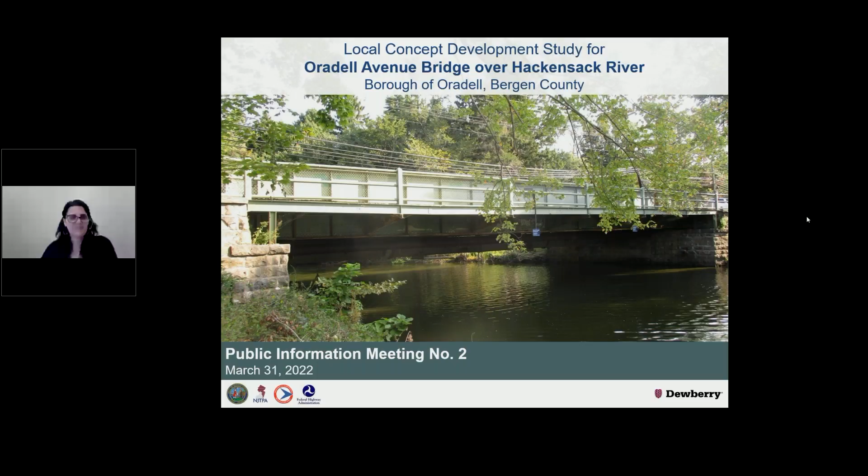Good evening, everyone, and thank you so much for joining us tonight at the Public Information Meeting number 2 for the Local Concept Development Study of the Oradell Avenue Bridge over the Hackensack River in the borough of Oradell in Bergen County. My name is Nicole Pace-Addeo, and I've been serving as the Public Outreach Manager for this study, along

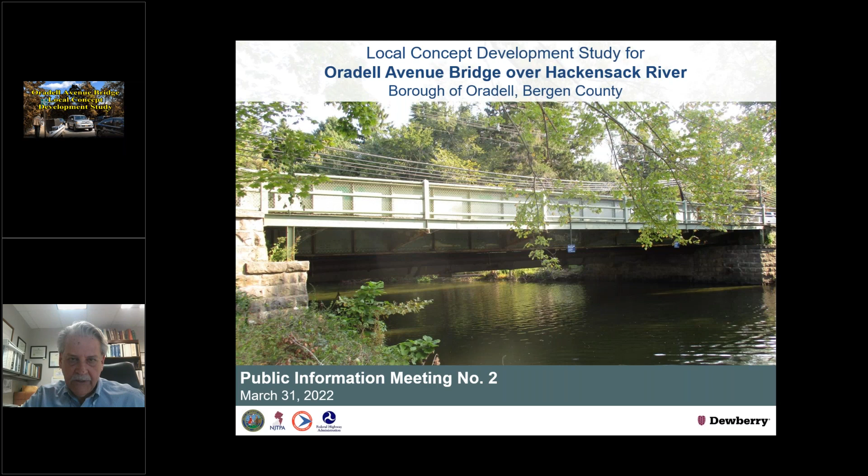So I will try and go through things quick. We can always go back through the slide presentation if there are areas that you'd like to revisit. So with that said, let me get rolling here. As I mentioned, today's agenda is really to bring everybody back up to speed since last time we met as a general public meeting, which was about a year ago. We have done a lot of work since then. We've gathered a lot of data. We've spoken to a lot of folks.

We've interacted with several. And we're here tonight to talk about the different alternatives that we identified to address the physical condition of the structure, and go through those with you and obtain feedback on the alternatives, so that we can walk away with support of a recommended or preliminary preferred alternative, or PPA as it's called, and then give you the information on what the next steps for the life of this project would entail.

So I'll touch base real quickly on a little bit of the history. Obviously, we're here tonight to talk about Oradell Avenue Bridge, which carries Oradell Avenue over the Hackensack River, located in the heart of Oradell. As you can tell from this aerial map, it's a major thoroughfare that links a heavy residential area to the east of the river with downtown Oradell, and a lot of public services and such. The train is immediately adjacent to the bridge. So it's a vital link within the region.

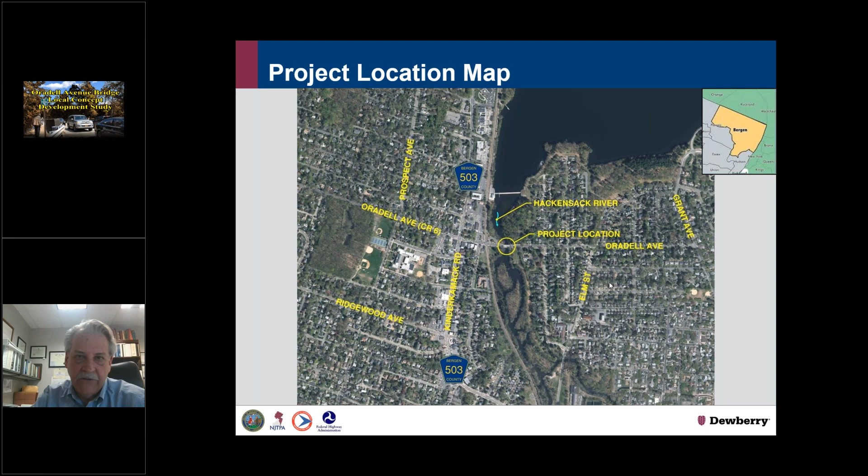To zoom in on the site itself, you can see how close the bridge is to New Jersey Transit's tracks and the Oradell station in downtown Oradell. It's surrounded by park property, environmentally sensitive property.

Rich, if you don't mind. Yes. Rich, we are only seeing your face, not the maps. Not the maps? That's not good. Hold on one second. No problem. Rich, I'm seeing the map. Yeah, we're all seeing the map. It must be just you, Bashar. All right, everyone's seeing the map except him. So let's continue on. Go ahead, Rich. Fortunately, Bashar, you know a lot of this anyway, so this will be just a brief revisited history. No problem. If it's only me, that's fine.

Okay. So just to give everybody a quick synopsis, in addition to carrying vehicular traffic, both eastbound and westbound, the bridge itself serves to carry public and private utilities as well. So as we're studying how do we restore the structural capacity of this bridge and maintain traffic and minimize impacts to the environment, one of the things we also have to do is make sure that we accommodate the public utilities.

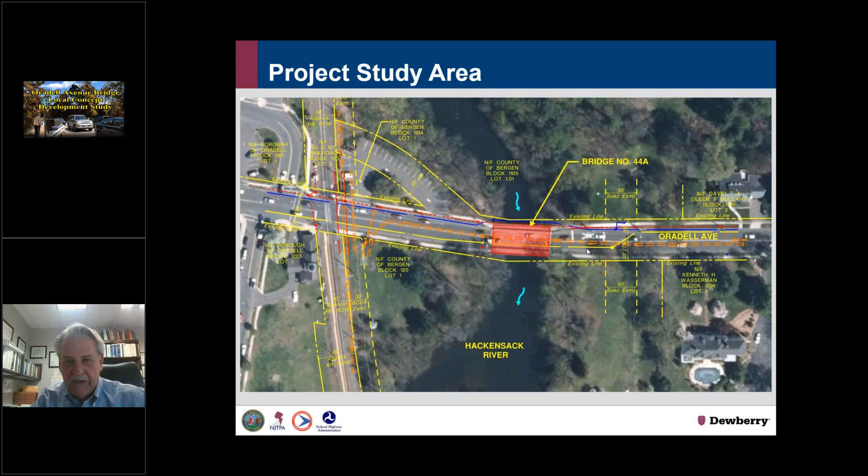So that will be touched upon in the presentation as I go through as well. Quick history on the bridge: built in 1904. So it has certainly outlived or lived its life, over 115, 118 years in existence.

The substructure, all the masonry work that's there, is from 1904. The bridge has undergone repairs over the years, but it is just time. Based on the inspections that are done on a biennial, every 2-year cycle, it's been identified that there's issues with the structure, there's concerns with its integrity, and the county and NJTPA recognizes

that these projects do take time to get from concept through to final design and be in position to take advantage of funding. And that's why we've studied the project that's starting now, so that it can get a preliminary preferred alternative and then advance to the next phase of its life and into the design phase.

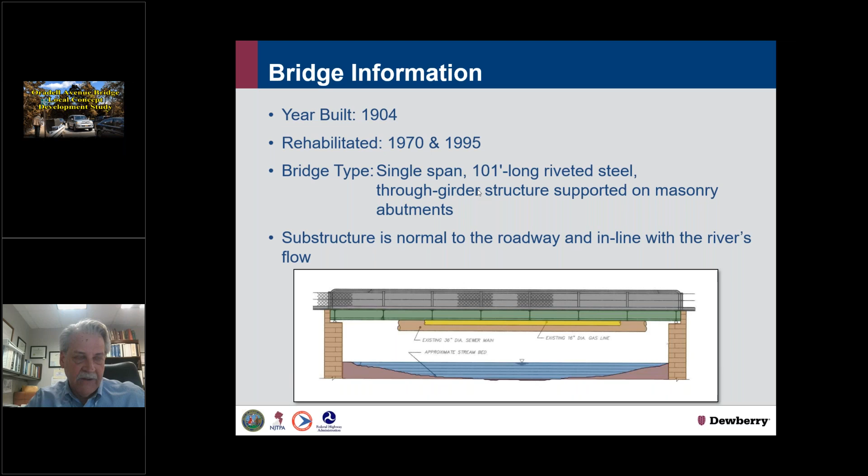A couple critical items that we'll talk about. One is the actual condition or the physical framing of the structure. It's what's called a through-girder system. As you can imagine, it gets its name from the two primary girders, one on either side of the structure. In this photo here, you can see the top of the girder extends above the top of the roadway surface on both sides.

These main girders carry essentially all the loads that are imposed on this bridge, and therefore it's considered a non-redundant structure. In other words, if deterioration significantly impacts one girder so that it cannot assist in supporting the load, then the structural system does not perform properly and you could have failure of the system. So in today's day and age, as engineers, we look to introduce redundancy into our structural systems. That's one key point to keep in mind as we go forward.

The other one, some of the additional information we had gathered, was we did go out and actually get some traffic counts on the bridge. We waited as long as we thought we could to let the pandemic situation kind of dissipate until we could get some reasonable counts. So we thought we were getting reasonable counts at the time. And you'll see here ADT is average daily traffic.

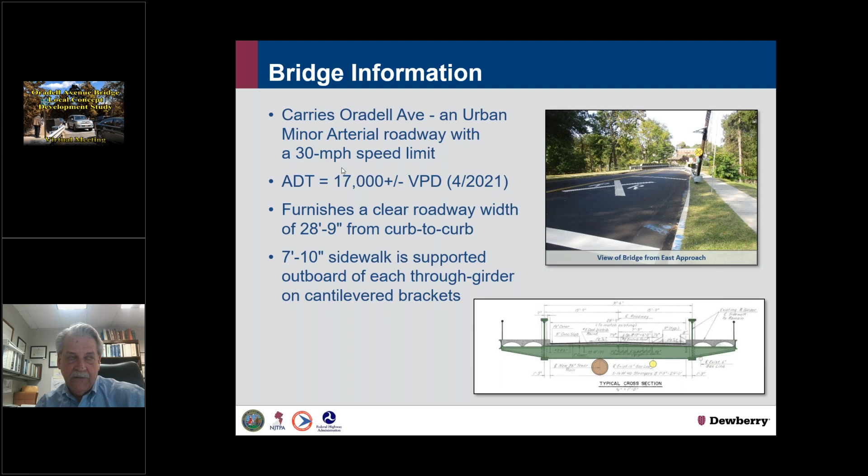We were looking for that information to see if it would guide us to look at different alternatives, as to whether it makes sense to possibly maintain only a single lane of traffic across the bridge while we're looking to rehabilitate it. And what came out of that was that we did not find that to be advantageous. So in all of the alternatives that I'll talk to you about, the intent is to maintain both lanes of traffic in operation throughout construction.

When we initially met, we talked about establishing a purpose and need. This is a critical document because it basically defines the reason for this project. What are we trying to do by studying this structure? It's pretty straightforward in this case, based on the bridge inspections, and the fact that the bridge has been identified through those inspections as structurally deficient. The purpose is very straightforward. The goal is to ensure that this crossing would continue to perform well into the future.

At the same time, one of the other goals was, as everyone knows who uses this bridge, that the roadway actually necks down. The bridge provides a narrower usable roadway surface than the approach to either side. So the goal was also to try and carry that roadway cross section through the structure.

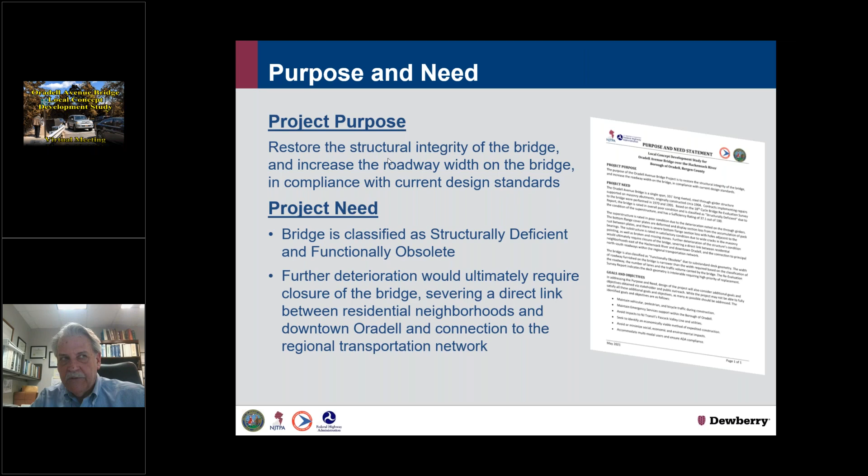Clearly, the goal was to maintain vehicular, pedestrian, and bicycle traffic across this structure throughout construction, if at all possible, for the entire duration. No one wanted to sever this link, if at all possible, to do the work to rehabilitate the structure and still maintain traffic. Okay, this was critical from an emergency services standpoint because emergency services is on the west side of the river. And as I mentioned earlier, there's a significant residential community on the east side.

Also, one of the things that we had learned is that the structure provides a crossing of the Hackensack River, that the crossing immediately to the south often floods during storms, and emergency services are still able to get across this particular bridge. So it's a vital link in that regard as well.

The other goals are pretty obvious. We want to make sure we minimize any impacts to New Jersey Transit tracks that are right there. And obviously minimize impacts to the surrounding environment. We are surrounded by park property. We are surrounded by historic sites. So the intent was to minimize those impacts while we're trying to get this bridge restored.

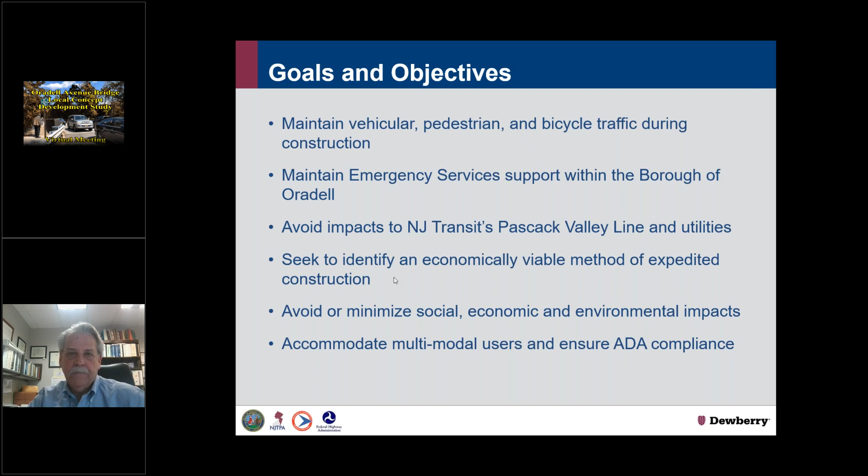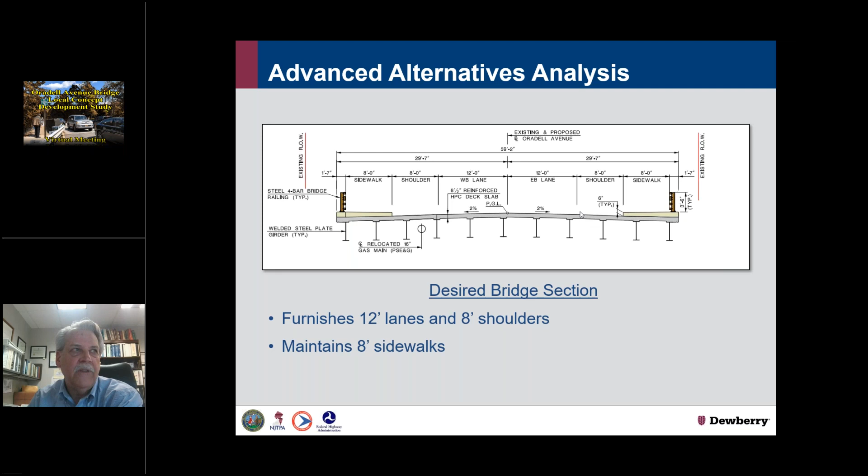So once we had gathered our data, as I mentioned, we recognized that one of the goals was to provide that same cross section of roadway across this bridge and eliminate the necking down of the roadway. So the desired bridge section that was developed was laid out to do just that. In other words, on the approaches, you have about a 40-foot curb to curb width. So that's what this desired section shows. Two 8-foot sidewalks, two 12-foot lanes, two 8-foot shoulders. And the goal again was to maintain sidewalks on either side of the structures, similar to what exists today. So that was our premise for the bridge cross section.

After that, we sat back and thought about, okay, how do we replace this bridge? And in essence came up with, in addition to a no build or do nothing alternative, which we always put out there but does not address the purpose and need, 7 other options. I'll walk through these and show you the advantages and disadvantages of each, and for certain ones, I'll show you the staging scheme. But alternative 2 is the only one in which we tried to reuse a portion of the existing structure, or could we rehabilitate this bridge and use a portion of it to achieve that desired bridge section and salvage some of the structure, if you would.

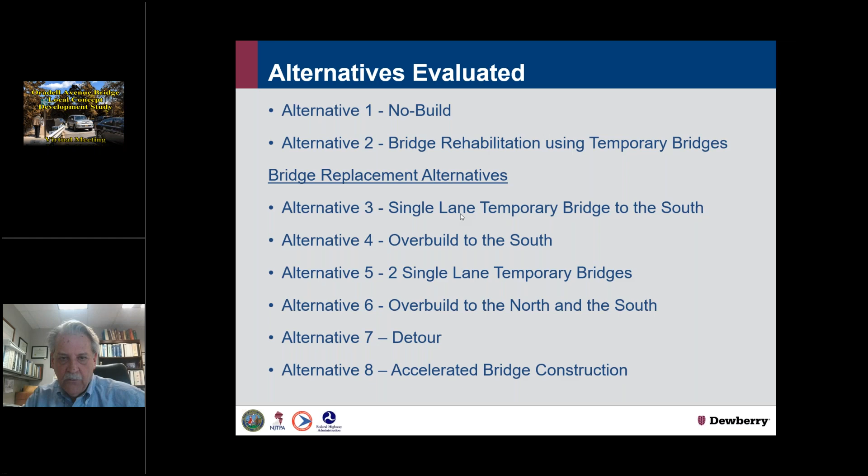All of the other alternatives that we looked at investigated a brand new structure, and the nuance between them is simply how would we try and maintain traffic while we constructed the bridge. So a lot of these are subtle differences. As I get into them, I'll explain those subtle differences, but that's really the dividing line between these alternatives. How do we try and achieve that goal of maintaining traffic and minimizing impacts to the users, and achieve a balance of those goals as best as possible. So with that, I'm going to jump right into these so that I get to your questions and hopefully answer any questions you may have.

So the first one that we looked at was, can we rehabilitate this bridge, or can we use any components from the existing bridge and in essence mimic that existing structure type? Well, as I mentioned, the 2 main elements of the existing bridge that are the primary structural members are the 2 main girders. Okay. Now, for us to carry the wider roadway system that's desired, in other words, eliminate the necking down from the 40-foot desired down to what's currently about 30 feet across the structure, we obviously would have to extend the distance between these two primary members.

In order to do that, as it's shown below, we literally would have to remove the existing deck, dismantle the structure, send these two girders out to be modified, strengthened, cleaned, repainted, supplemented with additional members, because by widening this structure to accommodate a wider roadway, we've introduced heavier loads onto those girders. And in addition to the pure size difference of the structure, today's design loads are greater than when this structure was originally designed. Obviously we've got heavier trucks, more vehicles using the bridge today. So the design criteria forces us to modify basically the entire structure.

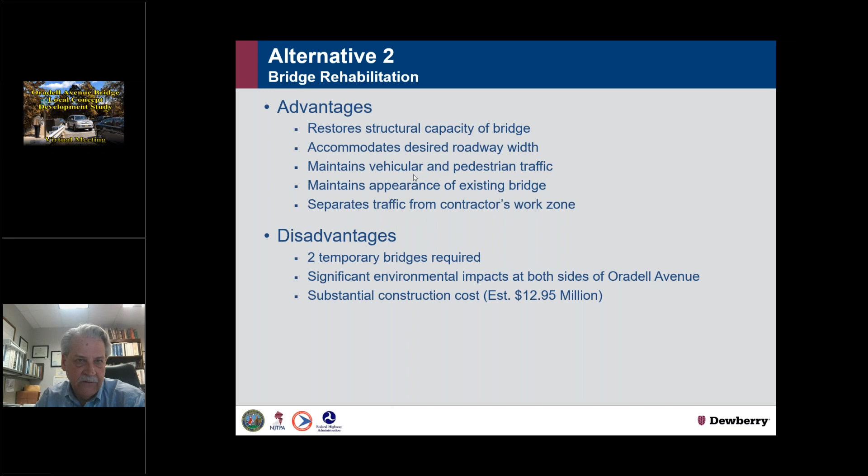But the disadvantages of this are obvious. We've got two temporary bridges, one on either side. So that significantly impacts the adjacent park property on either side, okay? And all of this comes at a significant construction cost, nearly $13 million. So as we moved on into our various alternatives, we tried to eliminate some of these disadvantages of the earlier alternative. So we proceed through logically, okay?

With alternative 3, we're basically saying, is there a way that we could avoid two temporary structures so that we limit some of that environmental impact associated with providing a temporary structure on the south and on the north? So under alternative 3, we said, let's try and reuse a portion of this existing bridge to maintain traffic while we put one lane of traffic on a temporary bridge on the south side.

Now, as I mentioned before, this existing bridge's structural framing consists of two main girders. So for us to reuse this portion of the existing structure to maintain traffic, we have to maintain that structural system. So under this scenario, while we bypass traffic on the southbound crossing on a temporary bridge, in order for us to remove a portion of the existing structure while we keep traffic on it, we have to install what's called a strong back girder.

And this girder, in essence, replaces the existing through girder on the north side. We pick up the loads to this temporary girder, which then allows us to dismantle the north side while we keep one lane of traffic open on the existing.

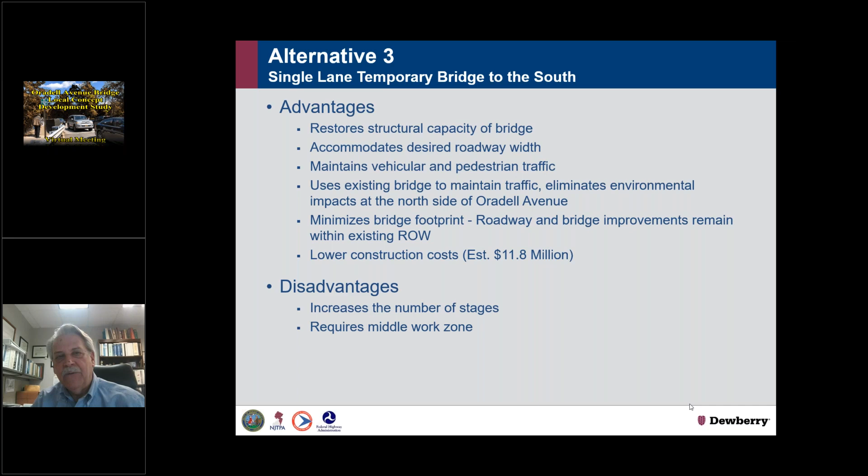All right, is there a way for us to eliminate the temporary bridge on the south side? Right, we started out with 2 temporary bridges. We said, let's eliminate one on the north. All right, can we get away with eliminating building a temporary bridge on the south side? Well, this solution, alternative 4, says, well, rather than put a temporary bridge out here, in the first stage, let's build a little bit more bridge than we actually need, but then we'll transfer traffic to that portion while we use that in combination with the strong back girder.

So to just walk you through this one, again, we would dismantle a portion of the existing bridge. We take the sidewalk off on the south side. We still maintain traffic, pedestrian traffic on the north side. We would then build a portion of the new bridge so that we could transfer the eastbound traffic to it.

Once we've transferred eastbound traffic to it, we install the strong back girder that we talked about under alternative 3. That allows us to dismantle the northern portion of the existing bridge while we maintain 1 lane of traffic on the remnant of the original structure. Again, then we build that piece that we demolished while traffic maintains its flows on the existing and the new. When it's all said and done, we shift traffic, we split traffic, putting that westbound traffic on the new piece, removing that last little piece of the original bridge, constructing it, and that allows us to then open the structure.

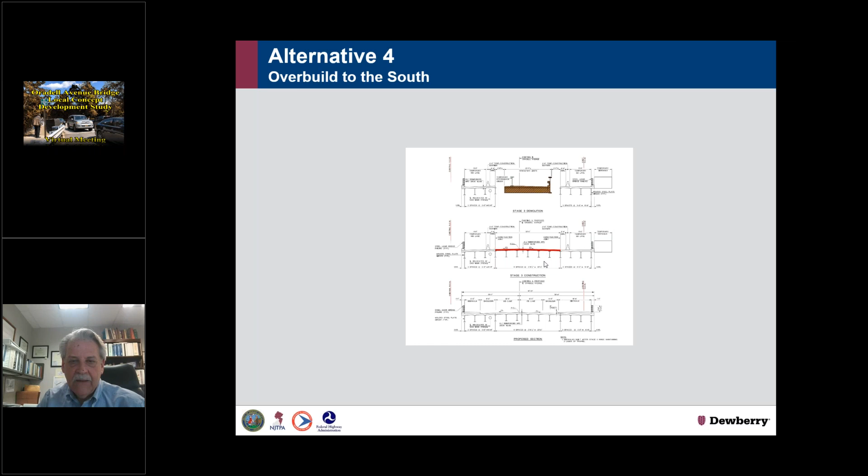so that when we get to the subsequent stage where we need to remove this northern half of the structure, we have a sidewalk area. Okay, so that is one of the disadvantages of this alternative, which I'll highlight in a sec. This just walks us through the rest of the construction where we've overbuilt to the south. As I said, strong back girder, we build the remnant. The remaining section gives us our overall construction.

Okay. The difference between this one and the early one and alternative 3, we don't need any temporary bridges. That eliminates the use of any temporary bridge. And I said we trade that off with impacts to the south side of Oradell Avenue, impacts to the park. So that's the primary advantage of this. No temporary bridges. The advantage is it also gives us a wider sidewalk on that south side.

But the disadvantages associated with this are this permanent diversion of park property. Okay, and in essence, we've built the bridge wider, 9 feet wider than we would really need for that desired cross section. Okay, so while it saves us money in temporary bridge, we've overbuilt, so its cost is fairly close to alternative 3.

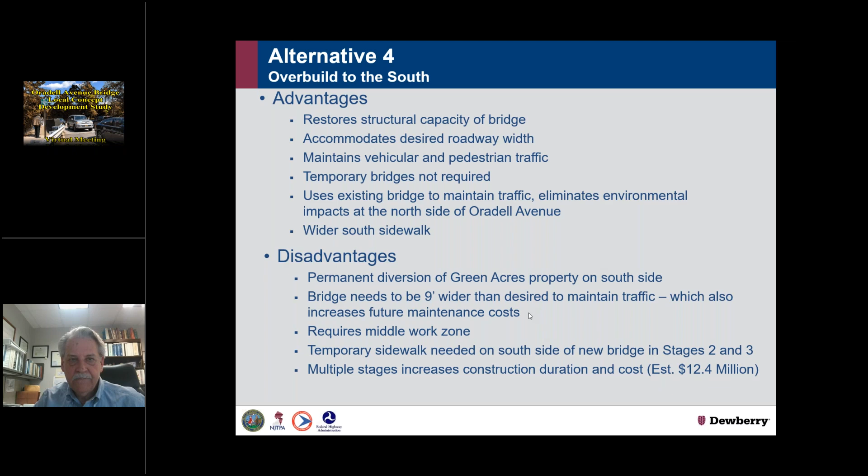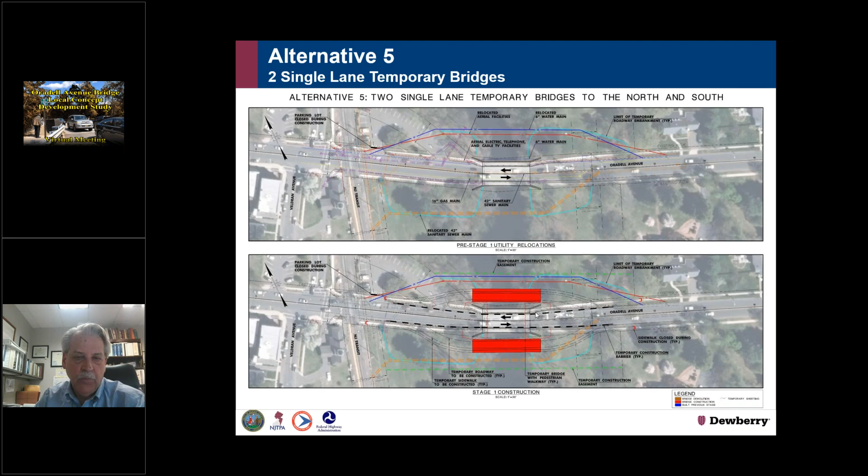Alternative 5, I'll go through pretty quickly, because alternative 5 is essentially alternative 2, where we said, well, if we could build 2 temporary bridges out here and not restore, we'll just get rid of the strong back girder, and we'll just go back to the original concept of alternative 2, which was put temporary structures out here, but rather than try and rehab the existing, we'll just build a new bridge in this corridor. So that's essentially alternative 5 in a nutshell.

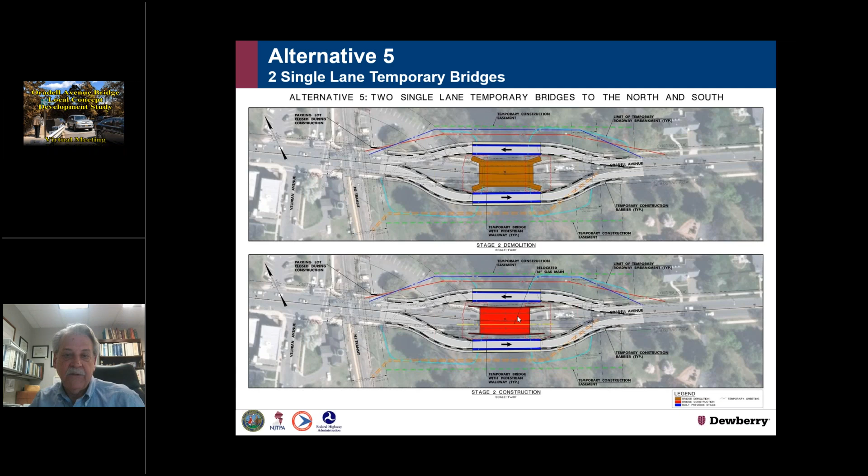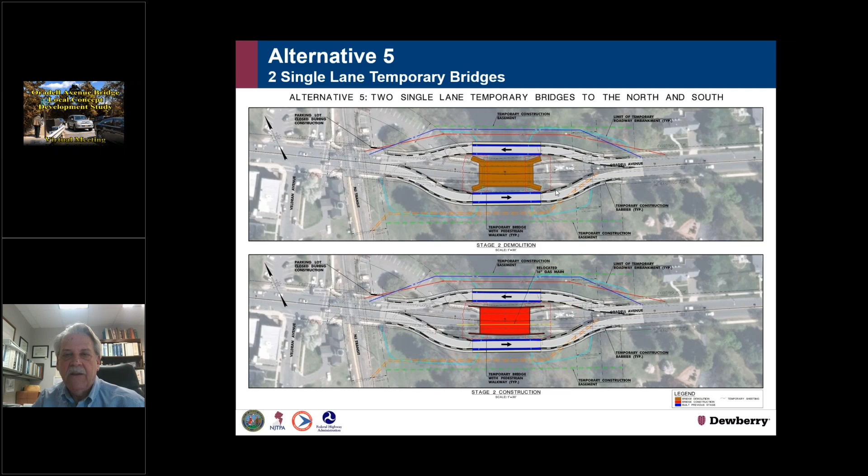Put the temporary bridges back, replace the existing bridge with a brand new structure, that would be redundant as opposed to the two girder system of alternative 2. Okay, so in essence, this section lets us remove this structure in its entirety. We build brand new structure in its place. That structure matches the desired section, and we have not had to reuse any of the existing system, and we don't have a two girder system. We end up with a redundant framing system.

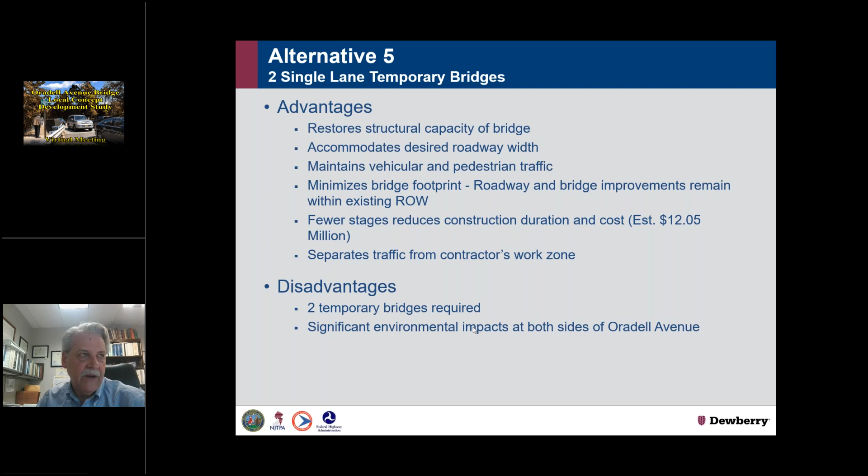Okay, so this has all those same advantages, if you will, of alternative 2, in that we can build the structure in one shot, where we move traffic to temporary bridges, allow the contractor to have that entire area to demo and reconstruct. It's a safe work zone. The problem is, again, we've got 2 temporary bridges and significant environmental impacts on both sides.

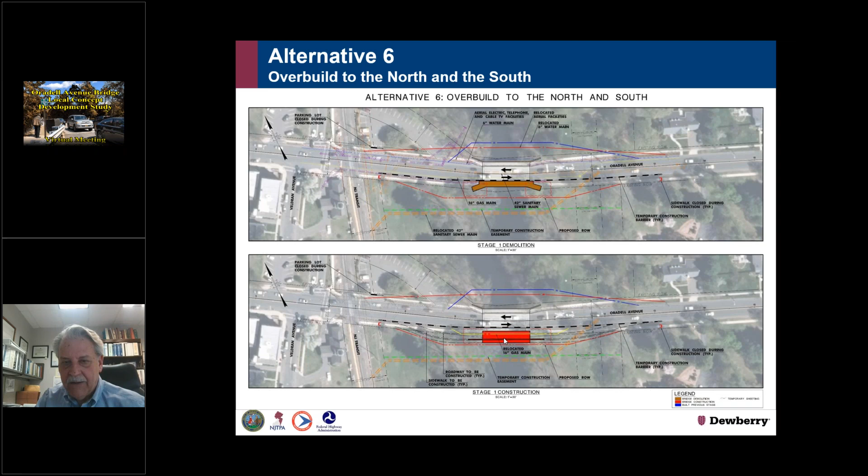Alternative 6 is alternative 4, which is overbuild to the south. Well, this eliminates any need for any strong back girder. We said, okay, if we could stage the work by overbuilding on the south, what if we overbuild to the north in combination? That's this option. So we would demo part of it, overbuild to the south, have traffic here and traffic on the existing structure. But in this case, we would not put the strong back girder on.

We would just maintain one lane of traffic here, remove the sidewalk on the north side, build enough new bridge on this side, but we'd have to overbuild it so that we could maintain one lane of traffic in the next phase so that we could then demolish the structure. So alternative 6 is basically overbuilding to both sides. And as you can see, we end up with significantly widened sidewalks, as you would expect on both sides, similar to where we wound up with a large sidewalk on the south side.

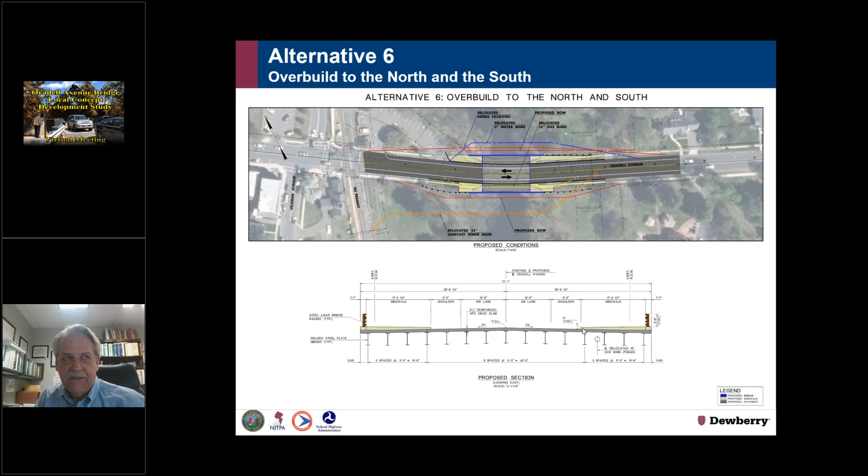By eliminating the temporary structures and the strong back girder, we end up with significantly wide, overbuilt, overkilled sidewalks, if you would, that far exceed what we would need out here. So, again, the main advantage, it eliminates any temporary bridges and eliminates the need for a strong back girder as well. Okay. The disadvantage is we've built a bridge that's 18 feet wider than necessary.

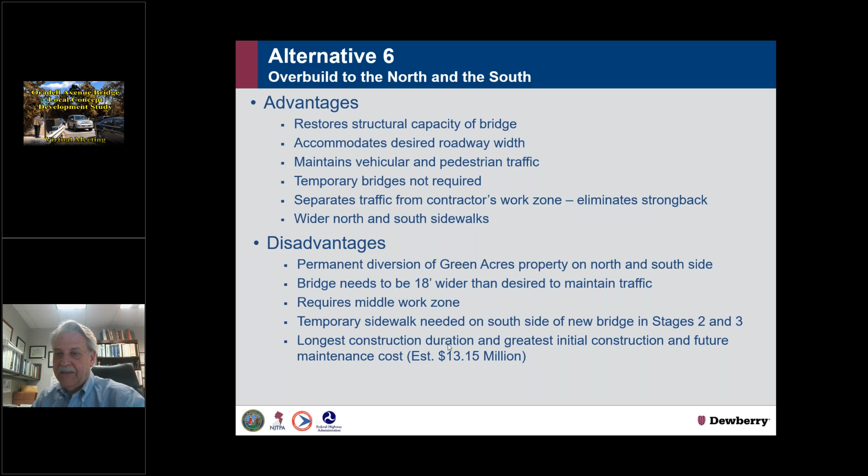We've got impacts from an environmental standpoint on both sides. That significant width of structure increases our overall construction cost. This one obviously has the longest construction duration simply because we're building more, and therefore it increases the overall construction duration.

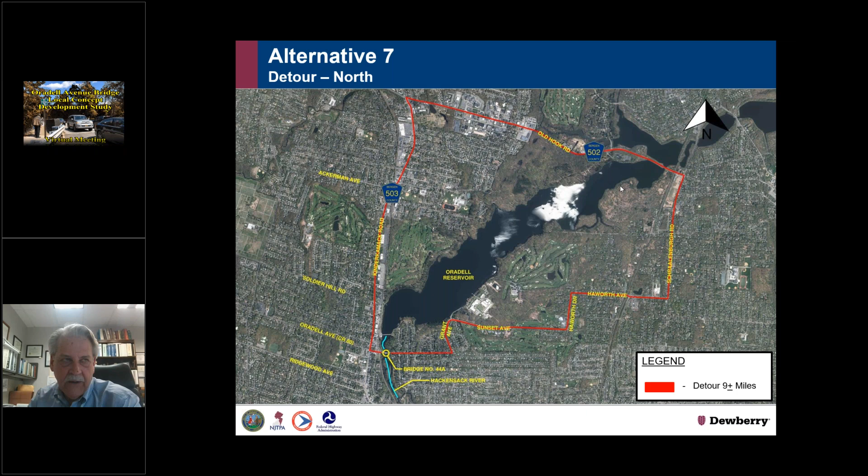We'd be remiss if we didn't look at, could we divert traffic in its entirety, detour everyone around the site, and see if we could get in, rebuild this structure as quickly as possible and get out. Okay. The problem with that is that, as you can see here from this slide, the detour to the north, you end up having to go all the way around the reservoir, 9-mile detour.

If we were to try and use a detour to the south, we're putting traffic on a structure that the EMS folks and the fire department have told us, their preference is not to do this simply because under severe storm events, this bridge can flood, and therefore they would be left without an easy access to provide service to the residents on the east side of the river.

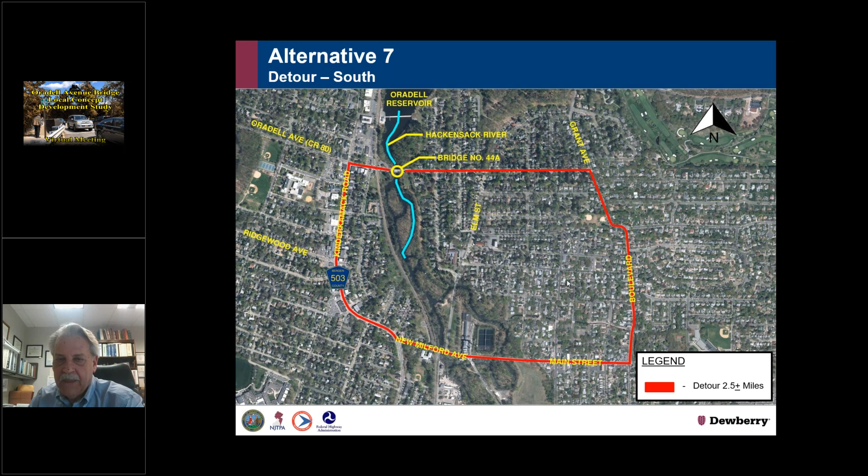Okay. So while the advantages of detouring the traffic are such that this gives us the shortest construction duration, gives the contractor entire control of that site. Okay, once he's removed the utilities and taken the utilities out of the way from a constraint standpoint, there's nothing stopping him other than dismantling the existing structure, building a new one. So while it offers the shortest duration, the fact that it requires significant detours is a major disadvantage to this alternative. So again, working through, is there any other way we could look at this?

We looked at our last alternative. We applied what's called accelerated bridge construction methodologies. Is there a way we could build an entirely new structure, brand new bridge in essence, on temporary falsework offline of this existing bridge, and then literally slide this new structure over after we close traffic for a duration of a short detour, demo the existing structure, slide this new structure in. Okay. In theory, it sounds great.

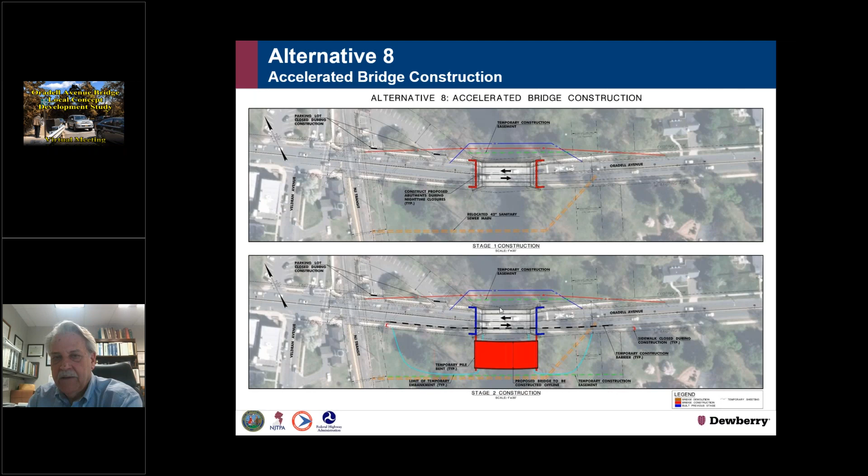The disadvantages to this are that you severely limit the amount of contractors that are familiar with this type of work, comfortable with this type of work, understand the risks associated with this type of work. And so by doing that, you limit the competition, your costs go up. Not only that, this also has the greatest impacts to the south side of the property because you're building an entirely new structure there. You got temporary falsework that has to come in.

We also would have to do modifications within the roadway system during intermittent detours, as well as night work, in order to build a new substructure, new foundation behind the existing bridge. So we'd have to come in and build all of that at night. Temporary plates would be installed so that you could maintain traffic, restore traffic in the morning. And all of this adds significant risk. So the costs go up.

So after all this is said and done, what we do is we use a matrix method to analyze the various alternatives. And we compile the matrix to basically on one sheet show us, okay, so which of these alternatives that we've looked at checks off the most of the boxes that we want. Okay, does it first satisfy the purpose and need? Yes or no? So you can tell all of these that we looked at satisfy that purpose of restoring the structural integrity of the crossing and increasing the width of the bridge. All of them address that.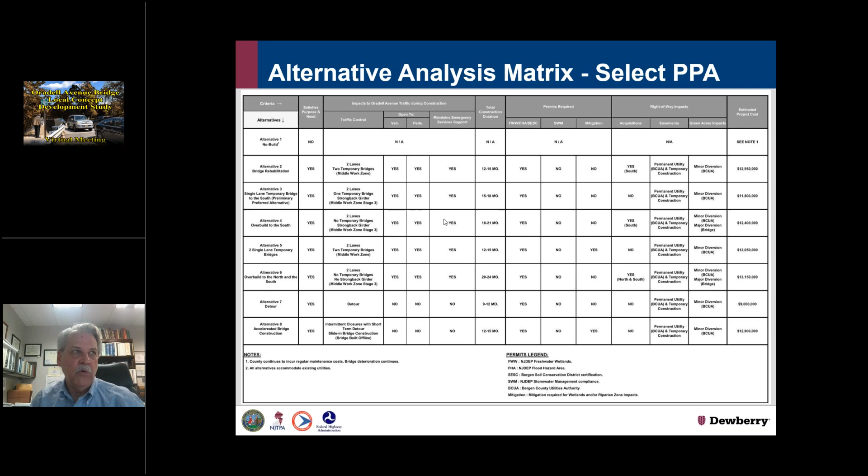And that was alternative 3. We feel that this provides the best balance, if you will: it restores the structural integrity, minimizes environmental impacts, in particular minimizes impacts to the park on the south side, and achieves all of this at a reasonable cost and at a reasonable duration of time.

Okay. With that said, as we had walked through these alternatives with local officials and stakeholders and heard from others as we developed these, it came to fruition that once we impacted the park on the south side with either a temporary bridge or overbuild or anything along those lines, we wanted to make sure that we mitigated any impacts to the environment.

In working with Bergen County Parks Department and Oradell, it's recognized that the park to the south and to the north, but mostly to the south, is being looked at for park enhancement. Bergen County has a long-range plan to enhance the park property, the linear park that extends along the Hackensack River.

And so in association with this preliminary preferred alternative, Bergen County Parks Department also did a conceptual enhancement: as we were to leave the site, after where the temporary structure was, we would be able to possibly enhance access and/or view shed of the river for everyone. And the Parks Department actually generated a rendering of a concept that would fit well with the preliminary preferred alternative and enhance access and/or view shed of the park.

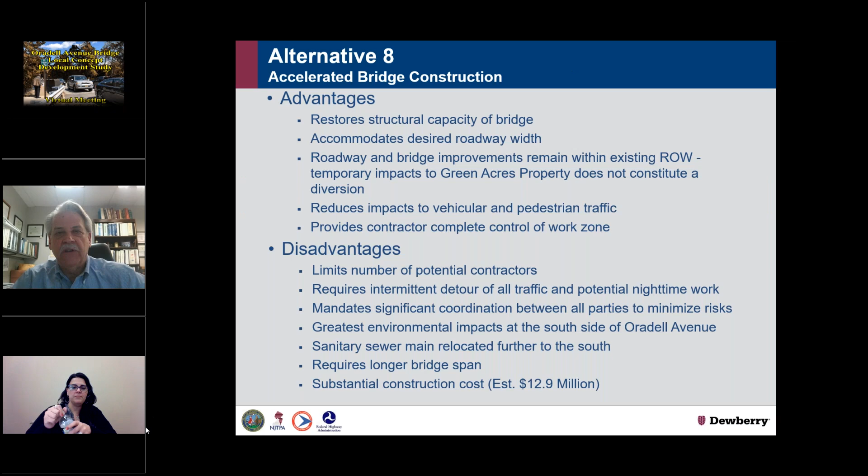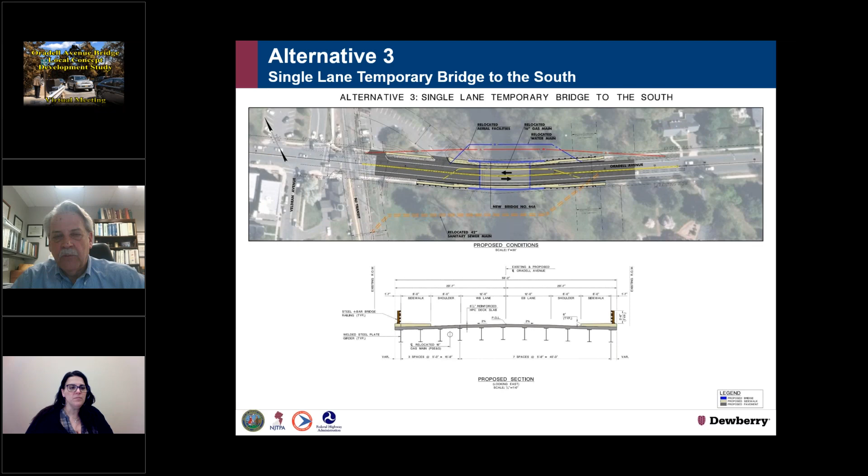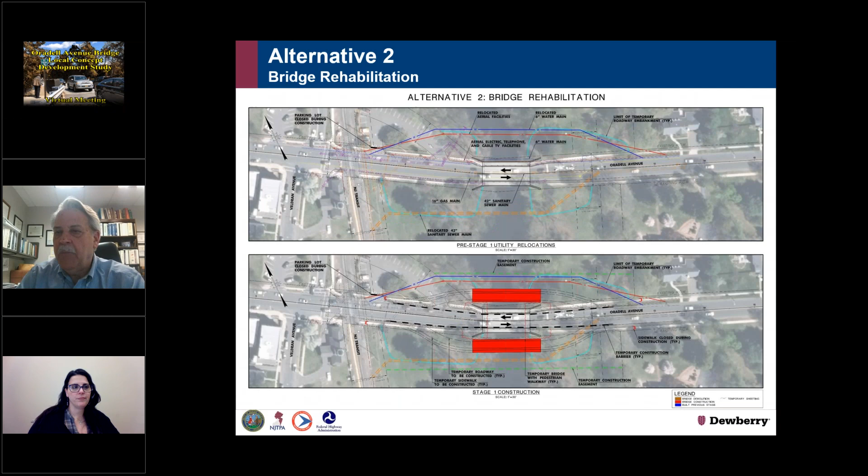So we're going to start with the first question. It says, when and if you replace the bridge, you said that you would mimic the existing bridge. Can you explain what parts would be different? Yeah. Well, I'll just slide back through these alternatives to get us back to alternative 2. We started with alternative 2 as the very first alternative, simply because we asked, is there any advantage whatsoever to us trying to salvage and reuse any components of this existing bridge? Does it make sense for us to salvage it?

Does it make sense at all to save any of the components? So that's why we included this section, because as you can tell from the top side, this is a slice literally through the bridge, the existing structure. It's got two main girders, one either side, that carries the roadway system with a sidewalk that's cantilevered outboard of the main girders.

This alternative basically says, could we salvage any of this structure and reuse it in a structure that, as I call, mimics this structure, in that, yes, they look the same, but everything here, exclusive of these two main girders, would be brand new. Simply because in order to extract these two girders, we have to remove the entire concrete deck. We have to remove all the floor beams and these cantilevers,

so that we can literally take these girders away from the site, send them to a fabrication shop where these two existing girders would be cleaned, repaired, and strengthened, so that in essence, we would redesign this member to carry the new loads imposed on it. So while these two look very similar, because they're still a two girder system, the only element that would be salvaged from this existing bridge are these two main girders.

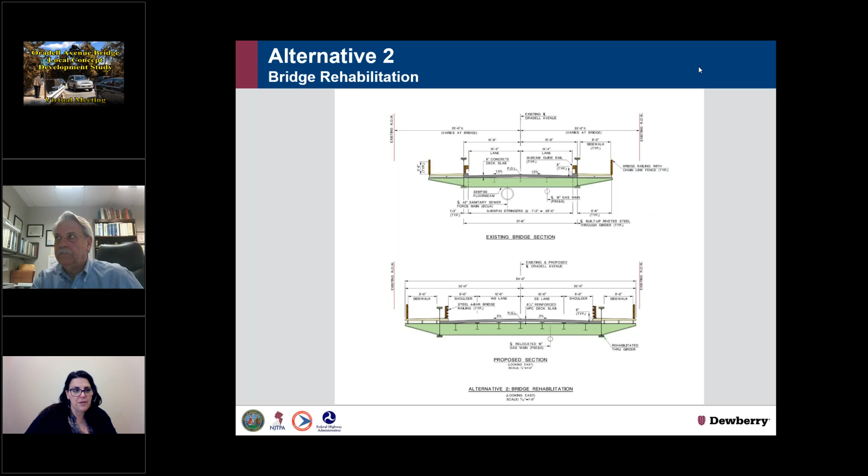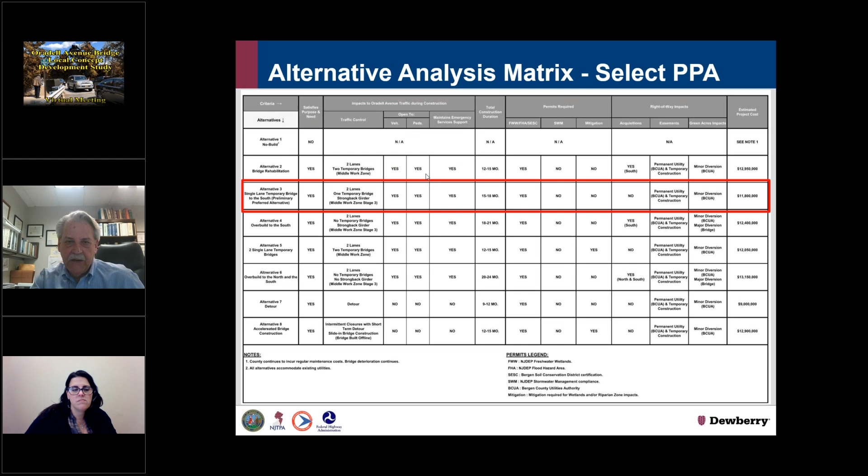Okay, thank you, Rick. The next question says, approximately how much longer would option 3 take to complete compared to the option with 2 temporary bridges? Okay, let me just run back to the matrix. I realize I went through the matrix very quickly, but on the matrix slide, one of the things that we identify is construction duration. Let's see if I could make this larger. I apologize, but this single column right here gives an estimated construction duration.

Now, you're asking how much longer would alternative, I believe it was for the two temporary bridges. Option 3 versus the option with 2 temporaries, yes. Right, so alternative 3, which utilizes a single temporary bridge, we've estimated the overall construction duration at between 15 and 18 months. Now, that's total construction duration. In other words, from when the contractor is engaged to when he leaves the site.

So that's not the amount of time that traffic is staged, or alternating through the construction zone, because there is work up front where they have to relocate the utilities, and that work is comparable for all of them. But this gives you a general range, 15 to 18 months for alternative 3. Alternative 5, where we would build a brand new bridge with 2 temporary bridges, we save a little bit of time, and we're saying we would do this in 12 to 15 months.

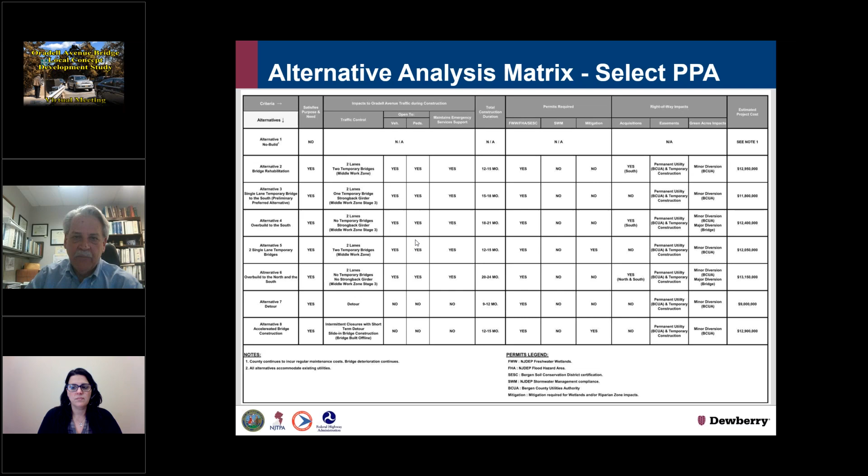The intent of utilizing the staging here is to make sure that we maintain direct accessibility to everyone between both sides of the community, and to make sure that all vehicles, including emergency services vehicles, would have access across at this location throughout construction. So will there be backups? I think there will be, obviously, to start. As you get a new traffic pattern, there's always delays. But what we've tried to do, let me jump back and show you, is keep the flow of traffic where it wants to be naturally.

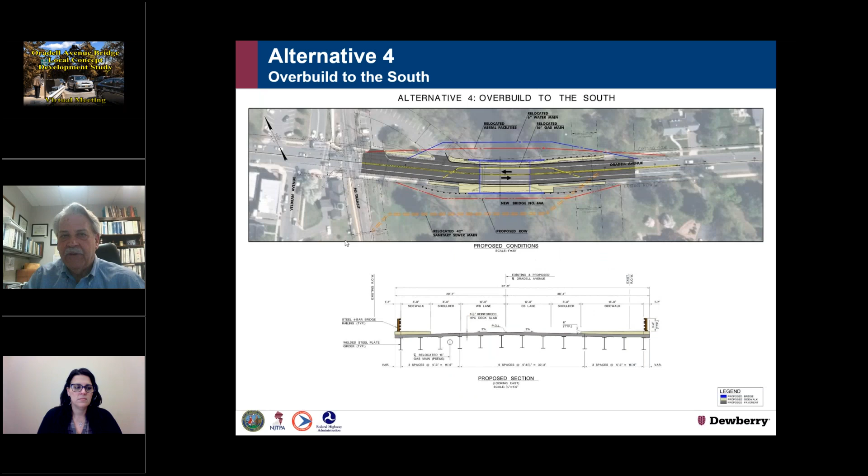So for example, if we jump to alternative 3 where we have the temporary bridge, I apologize, let me get back to it. Okay, where we have the temporary bridge, our intent is to keep everyone in eastbound and westbound traffic where they would ideally like to be. In other words, if you're on the right side headed eastbound, you'd want to stay to the right. It's just natural. As you're coming westbound, you'll just be slid over a little bit, but you end up on the appropriate side of traffic so that there's no crossing over of traffic flows.

So once the traffic flow is established, then most people would get comfortable with it, and the flow tends to restore its normal flow. There are certain constraints that are going to obviously control flow here anyway. You've got the at-grade crossing with New Jersey Transit's traffic for people being dropped off at the station and getting picked up. But that's the intent of the staging schemes, is to try and keep traffic in its normal pattern as much as possible. That's why even when we tried to split and put the traffic on the north side, it gives the contractor the center zone, as opposed to putting both temporary structures on the south side, for example.

But to answer your question, there will be delays. But I think the flow, because of the speed of the road, will kind of alleviate itself. A lot of people would also, you know, there is New Milford Road to use. Other people will get comfortable with the construction zone. Some people say, I just want to avoid it, and if it takes me a little bit longer to go New Milford, as long as New Milford is not flooded, obviously, they may divert and use New Milford. But the intent is to keep this thoroughfare and this corridor open to traffic as much as practical.

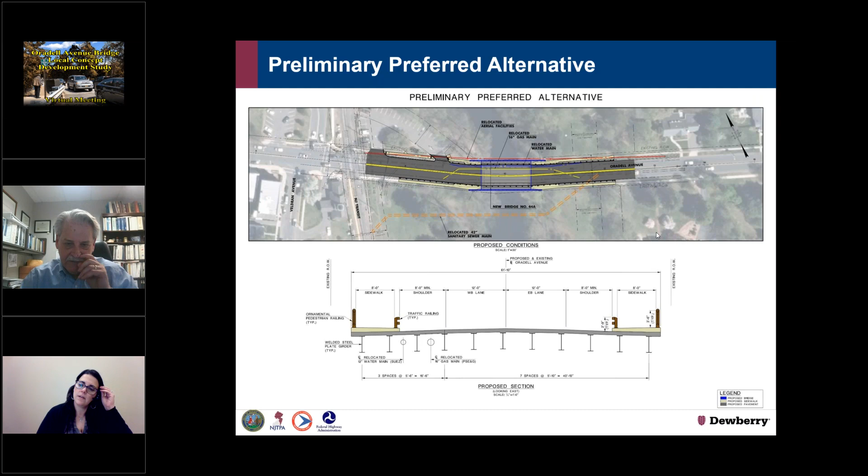Rick, a question came in about the projected date for the next phase. When do we think that PE would start? Well, here's the process. Our time frame to complete the study, the LCD phase, the local concept development phase: our goal is to be done with our report and have the report reviewed and approved by everybody, including Federal Highway. Our goal is to have our report done by June of this year. What happens next is once the project status is approved and, quote unquote, graduates, Bergen County would then prepare a request for proposals to advance the next design phase.

So then that could take anywhere from 6 months, depends on funding. If Joe's still on, he could probably give a good handle on this, or if someone is on from NJTPA. It could take 6 months to a year, let's say, until that funding and selection of a firm to advance the design phase could be instituted. Then you would go into preliminary engineering, which would entail obtaining the environmental documents necessary for the project. And once the environmental document process is complete, you could then advance to final design, where you get into what I'll say is the hardcore design for the project.

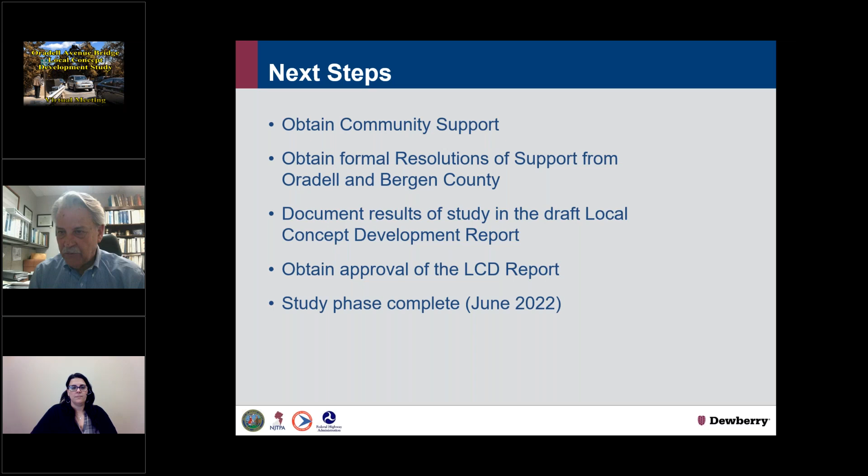So the intent is that traffic will be allowed to continue along Oradell and cross this location, as we mentioned, in this case using a temporary bridge in combination with the strong back girder solution to allow us to do that. Okay, thank you. And we don't have any other comments or questions right now in the chat box.

So once again, we'll just continue to remain on the line unless anyone else thinks of anything. But again, the formal presentation is complete. We've gone through all of our meeting materials. So now again is your opportunity to give us some feedback or provide some questions or comments that you might have.

I have another one, Rick. Good. I know, as soon as I'm done saying it, another one pops in. That's fine, that's great. We want you to continue asking, that's what this is all about. It's your turn to talk.

So, all right, I've got another one. It says here, not considering the expedited option, will any of the options 3 through 6 involve working in the evenings? Well, no, the goal of the work is to not have to do anything at night. And the only one that I saw that had any potential for night work would have been the expedited option, alternative 8, simply because you have to do work in the road.

So ideally, there should be no night work on it. I'm just thinking there may be some deliveries where there may be a temporary slowdown of traffic in one direction to allow the contractor to deliver some materials, that type of thing. But no, the intent would be that he gets his work done during the day.

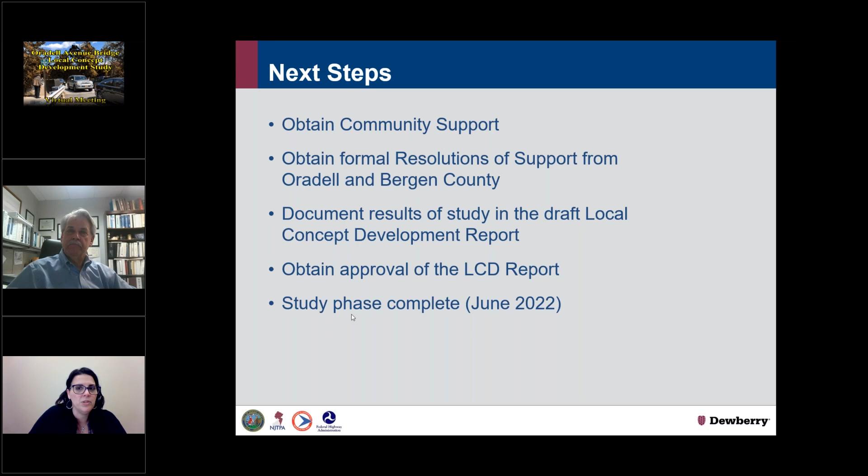Rick, maybe since there aren't going to potentially be too many more questions, maybe you can put the last slide up with the contact information if they have any questions. There was a question actually just asked about the lighting. Will lighting be proposed with the new bridge? And I guess what I'm wondering is the question, will the bridge be lit or will the roadway lighting that exists today be supplemented? Street lights, it says. Yeah.

Well, as part of the job, if in fact there is a concern right now with additional lighting being necessary, I think that could just be brought to the attention of both Oradell and or the county. And that could certainly be addressed as part of the design, in the design phase. Our primary focus was to look at the bridge itself and how we would replace the bridge, and focus on that from a staging standpoint, et cetera.

But if there is a concern with adding additional lighting, whether it's roadway lighting or just lighting in general, given the fact that it's close to the train station and such, I think that would just be brought to the municipality and or the county, which could be incorporated or addressed, I would think, in final design or in the design phase. Absolutely.